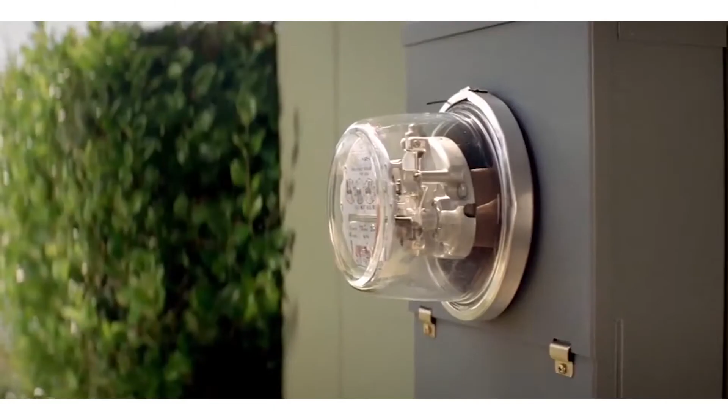Second, we expect service to conform to basic standards for voltage and frequency, and we call this power quality. The problem with poor power quality is it can reduce the lifetime of appliances and equipment, cause flicker with lights, and have other unintended consequences. So these are the two aspects that we want to keep in mind as we talk about the impacts that renewables can have on the grid.

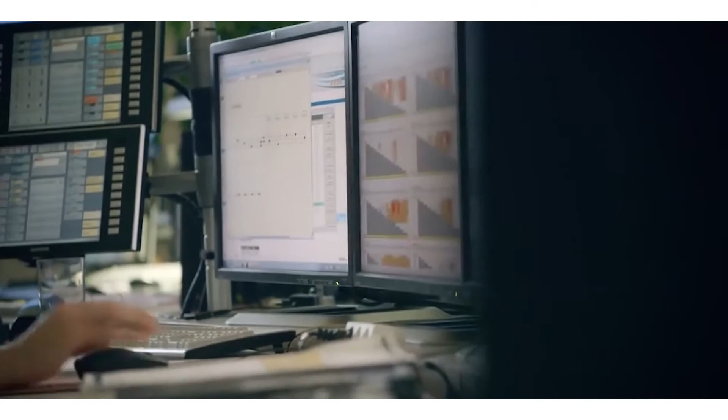Reviewing the options here for building a low-carbon system and ignoring hydro and biomass, which don't have the same technical potential, we have three basic options. The first is fossil fuels with carbon capture and sequestration. Theoretically, these plants can operate much like power plants do on the grid today. Second, we have nuclear, which while less flexible, can still be operated flexibly enough to meet the two balancing criteria from the prior slide. And finally, we have renewables, such as wind and solar, which while favorites for decarbonizing the electricity system, each present unique challenges for balancing.

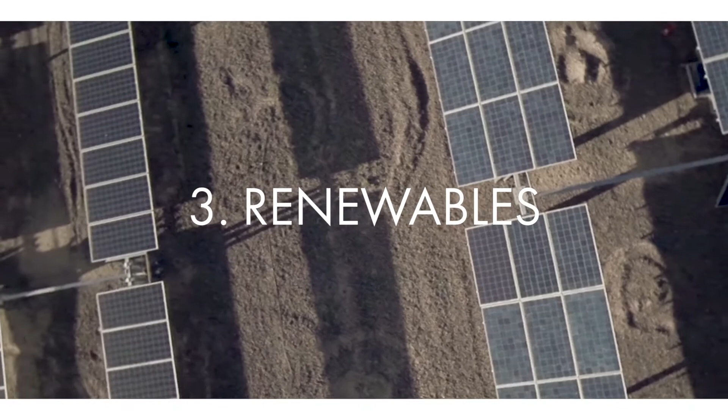Why exactly are renewables a challenge? First, their output is variable, meaning it is not controllable and oftentimes it will change rapidly. And second, their output is uncertain, meaning it's not possible to predict when exactly they will and will not be producing electricity and how that will change in the future. And so this can cause real problems scheduling power plants or electricity trading.

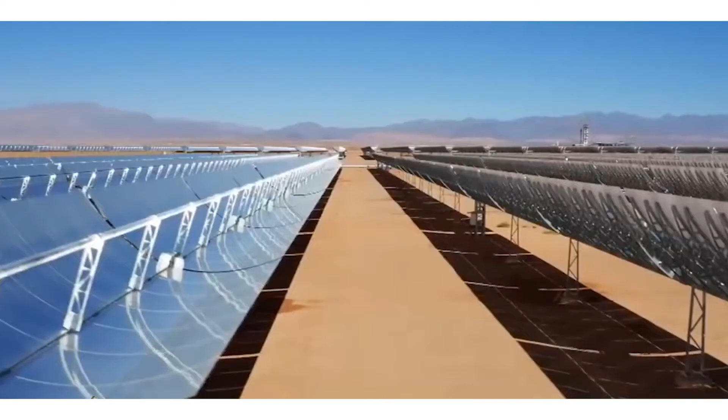Third, the locations with highest resource endowment are not necessarily locations that overlap with where we have demand or where we have existing electricity infrastructure. Finally, there are some technical reasons why conventional power plants with synchronous generators are different than renewables, which use power electronics. When we think about these issues of balancing load, those issues can occur over a certain length of time and in a certain place on the electricity grid.

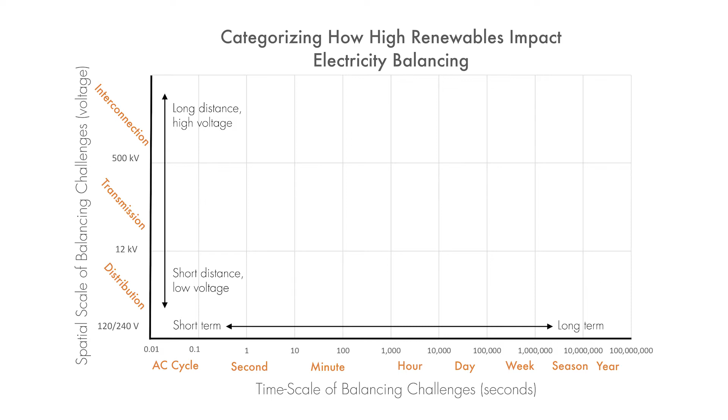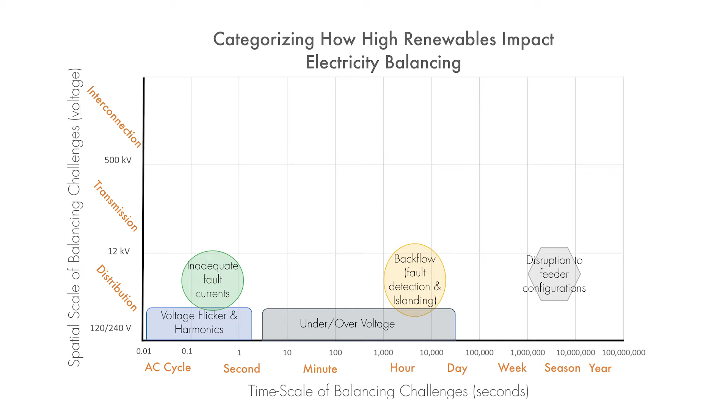So mismatch between supply and demand or power quality issues can happen over many different time scales, shown here on the x-axis, and they are also specific to a location on the grid, shown here on the y-axis. On the distribution system, the problems that occur from high renewable penetrations happen only when renewables are physically located on the distribution system. And these issues arise predominantly because most distribution networks have been designed with the assumption that there is only load on the network, not generation.

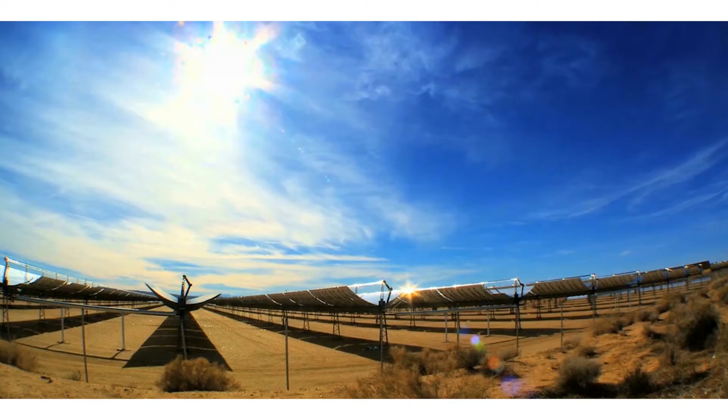To categorize these further, they really fall in one of three categories: they're related to power quality, wear and tear on utility equipment, or safety when it comes to utility workers. With new distribution system equipment or good control schemes for distributed generation, we can solve each of these issues, but fixes can be expensive and therefore, effectively, you can have limits to the amount of renewables that can be deployed on any single network.

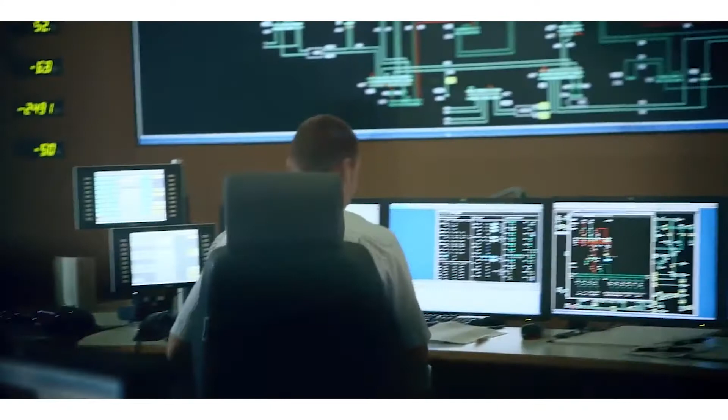So next, we have challenges from renewables that occur on the level of individual utilities or balancing authorities. Often these issues touch on the dispatch and operation of conventional fossil generation that gets used to meet the difference between load and renewables. The good news is most systems have been shown to have a fair amount of latent flexibility in their generation resources, so that moderate renewable penetrations have been accommodated without too much expense. And much of this will depend on the age and the type of generation on the system to begin with.

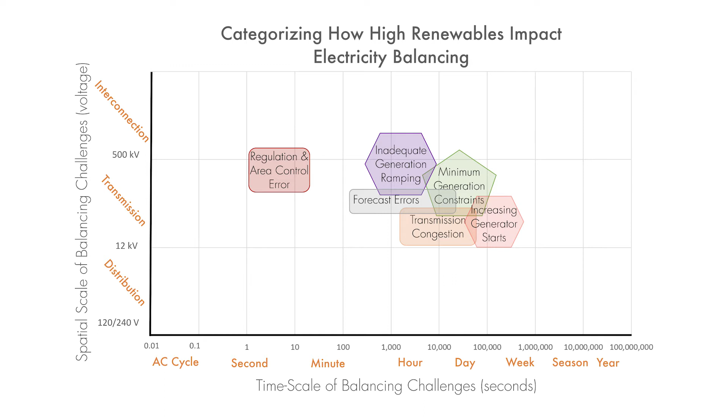At the utility level, as penetrations of renewables increase, the time scale of the dominant balancing challenge tends to increase from left to right. So starting with regulation and area control error on the left, and as renewable penetrations build, we move into the bubbles to the right, ending with minimum generation constraints and increasing the number of generator starts. Finally, at the interconnection level, which may encompass dozens of balancing authorities, the challenges associated with high renewables relate to the imbalance between load and supply across many different timescales.

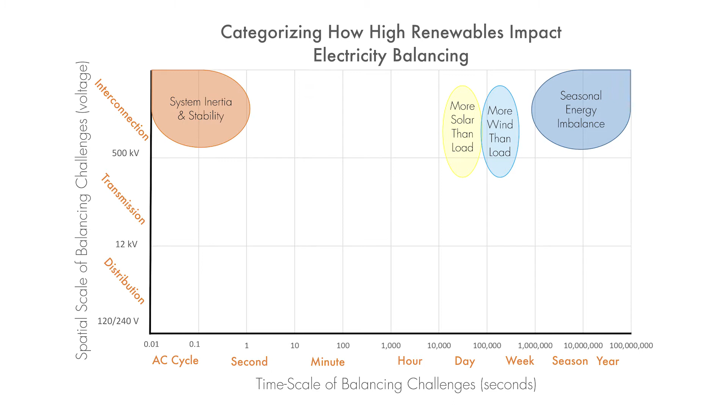The types of renewables deployed, whether wind and solar, and other factors can significantly change the patterns of energy imbalance and therefore the type of solutions deployed. So now putting everything together on one chart here and thinking about the enablers for high penetrations of renewables, it's important to think about how they map onto these dimensions for load balancing.

So now adding to this two solutions that we are talking about now, energy storage and new transmission, or more generally, transmission and coordination between balancing authorities. Some of these problems may be solved with storage, others may be solved with transmission, and some may be solved using both, but sometimes at very different costs. So not all of these issues occur on all systems, and oftentimes can be minimized with smart deployment of renewables.

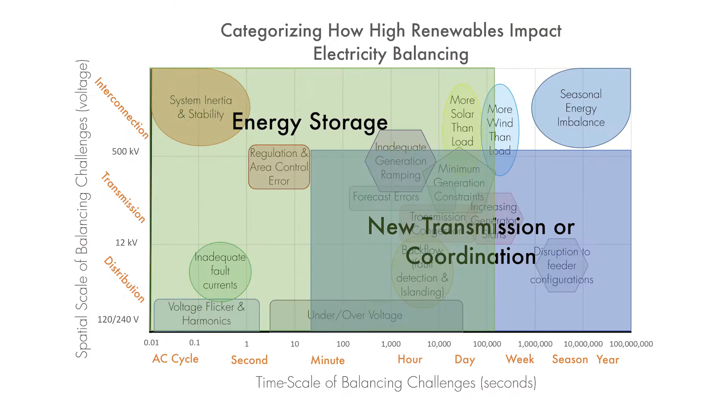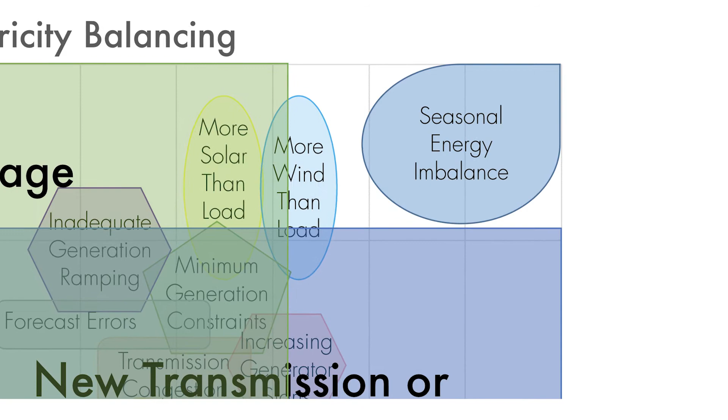So next, let's focus on this bubble in the upper right corner where we show seasonal energy imbalance that's not easily solved by either storage or transmission, and talk about that issue in more detail. So the basic issue is that assuming the deployment of renewables was your dominant strategy for decarbonization, the production of energy across the year from wind and solar will probably not line up with when during the year the energy is actually consumed by customers.

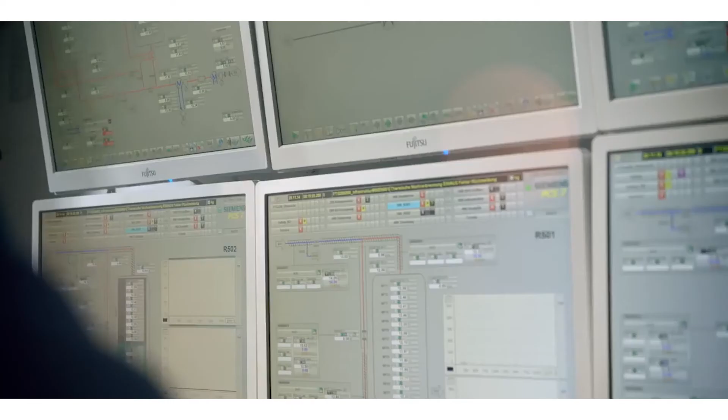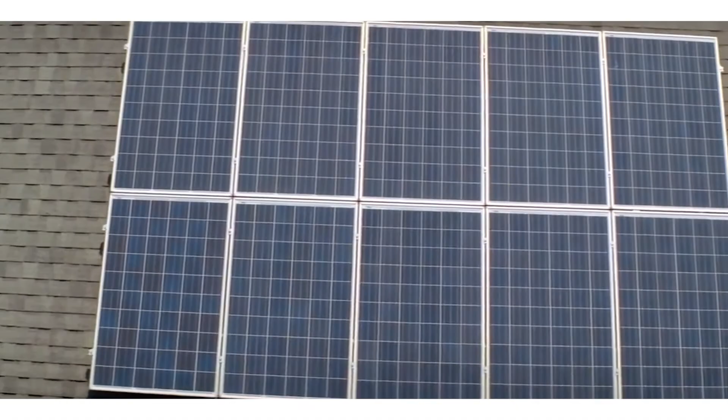This is an issue if you think about energy storage being used to basically solve this problem, because for an energy storage resource, you would be charging twice a year, once in the spring and the fall, and you would be discharging only one time per year in the summer. It would be a huge amount of energy storage required to meet that demand, and therefore it would really be prohibitively expensive. The US DDPP reports, which have been mentioned already, talk more about this issue and some of the different solutions that we've seen in our research to help deal with this.

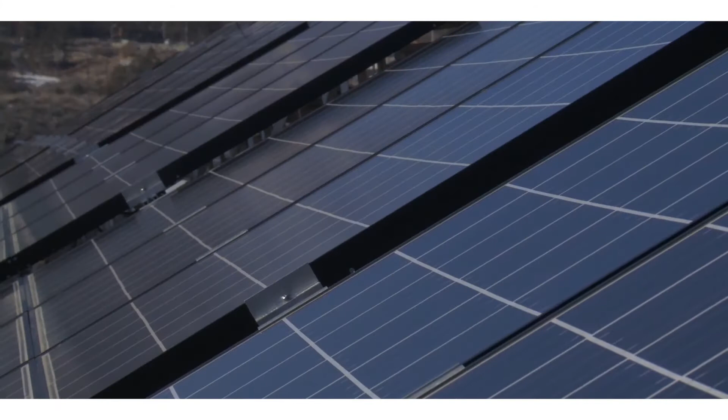Thinking further about designing solutions to balancing problems, deploying these balancing solutions intelligently is important because the same solution isn't going to work everywhere. It's also important to recognize that curtailment of renewables in some quantity is actually optimal and gives us the lowest cost energy system. This is a good thing to keep in mind because a gold-plated system that integrates every last megawatt hour of wind or solar is not necessarily desirable.

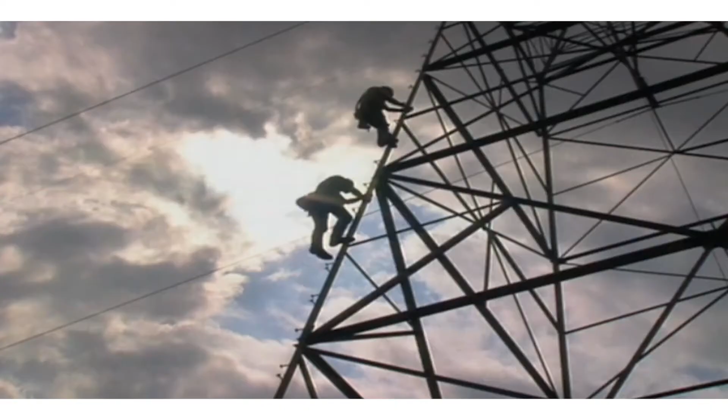So to summarize, when you look at the details of grid balancing, the issues are diverse and complex and must be understood together with the particulars of any specific power grid. But we do have many effective solutions for the problems posed by renewables, and this ultimately makes it more of an institutional and economic problem rather than an insurmountable technical challenge.

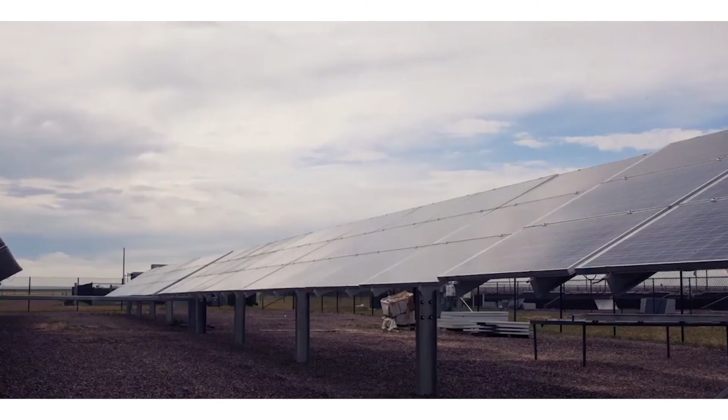Finally, balancing solutions must be tailored to the specific location and timescale of balancing problems because no solution is universally effective. So if we think about using storage alone, it is likely that that will be prohibitively expensive on the system. Using transmission alone is not going to solve any interconnection level problems. Using flexible load alone will probably degrade service, and while some renewable curtailment is rational, using it alone is likely very inefficient.

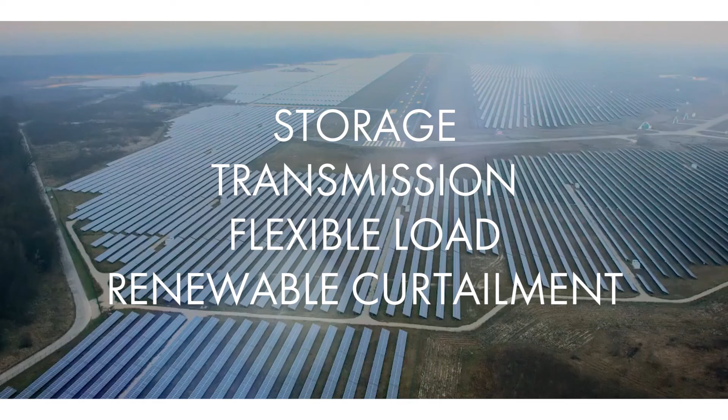But if you look around the world at many of the locations where we have particularly high penetrations of renewables today and where they're pushing higher, places like California, Germany, Spain, Denmark, those are each places where some combination of these four strategies is being used effectively today, and many of them, storage in particular, and also flexible load, are becoming wider spread and also cheaper, which really leads us to believe that many of these problems that I've presented from renewable integration are ones that are definitely surmountable in the near future. So some combination of these strategies is technically feasible and is shown to be economically feasible in many locations around the world today.